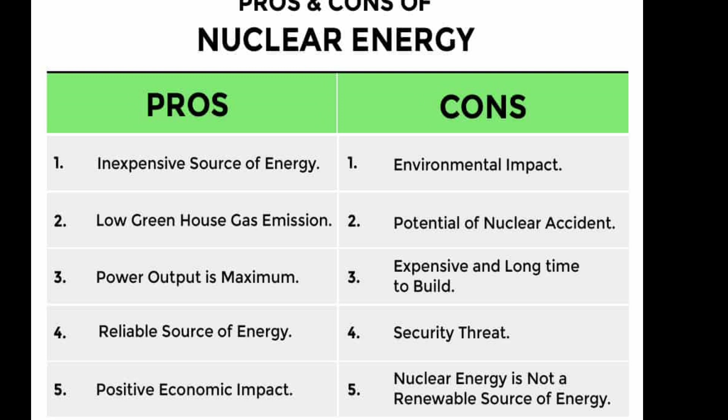About 80 miles north of Kiev, just between the border of Ukraine and Belarus, engineers found a woodland area with a low population density, a perfect place to construct a nuclear power plant. The Soviet Union was moving more towards nuclear power due to the distribution of its population, where the majority of civilians resided farther away from the main supply of energy sources in the eastern part of the region. The Soviets also knew that nuclear energy was less damaging to the environment than conventional power sources.

This woodland area to be used for the proposed power plant was about 9 miles northwest of the town of Chernobyl, with a population of 12,500. However, with the development of the Chernobyl power plant, the town of Pripyat sprung up just over 1.5 miles away with a population of 49,000 as employees for the plant and their families moved into the area.

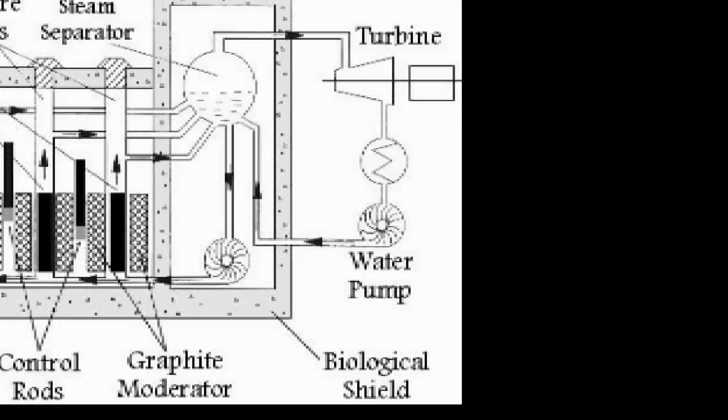The nuclear plant was slated to have 6 nuclear reactors. The first 2 RBMK-1000 reactors were built between 1970 through 1977. Units 3 and 4 were completed in 1983, and 2 more units were in construction at the time of the fateful accident. RBMK-1000 reactors were a Soviet-designed graphite-moderated pressure tube, which used 2% uranium-235 uranium dioxide fuel. Uranium-235 is a uranium isotope that can sustain nuclear chain reactions.

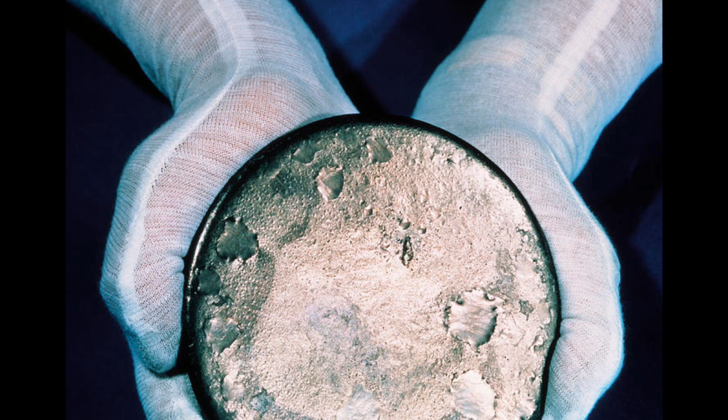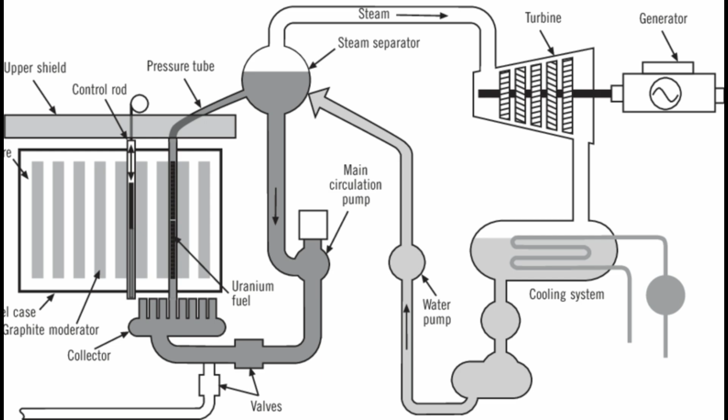These reactors use steam to power 2 500-megawatt turbines. The water pumped into the bottom of the fuel channels that boiled as it was pushed up the vertical pressure tubes to create the steam also acted as a coolant for the zirconium alloy-clad uranium dioxide fuel. In the design, there were 4 main cooling pumps, with one always being on standby. The reactors were also equipped with various safety measures, such as an emergency core cooling system and a minimal insertion of 30 control rods to absorb neutrons and reduce fission rate.

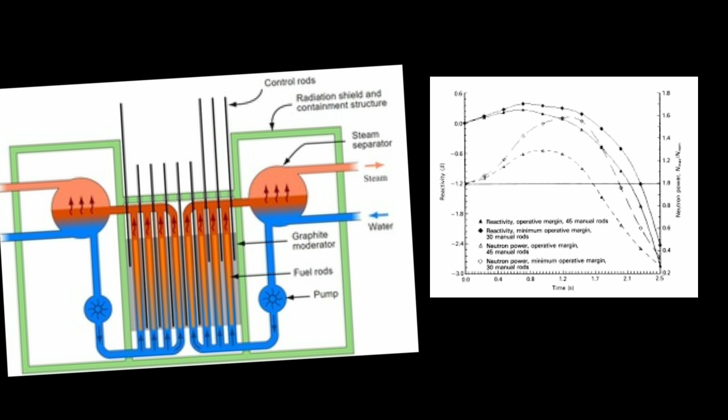However, one of the most important things to know about the RBMK-1000 reactors was that it possessed a so-called positive void coefficient. This meant that if the power increased, or the flow of water decreased, steam production would increase, so that the neutrons that would have been absorbed by the water now increased fission in the fuel. When the power increased, that meant the temperature of the fuel also increased, which reduced the neutron flux. The consequences of these 2 opposing forces vary depending on the power level.

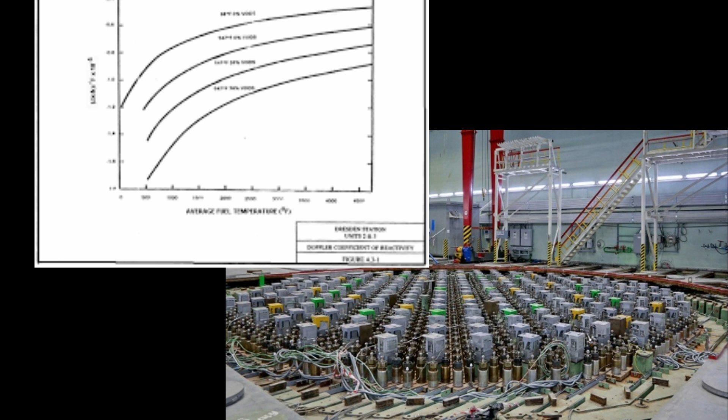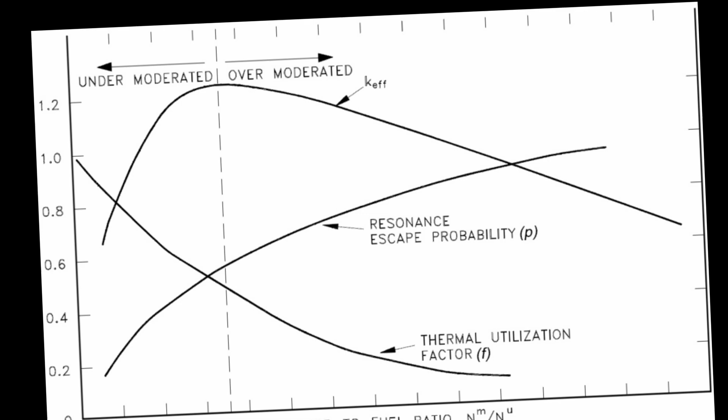When the power level is high, as it was during normal operations, the temperature effects win out, and the excessive overheating of the fuel does not occur. But when the power output is less than 20% of the maximum, the effects of the positive void coefficient win out, and the reactor becomes unstable and prone to sudden power surges. This was an integral part in the development of the meltdown.

On April 25, 1986, the Unit 4 reactor was down for maintenance. It was determined that at this time, nuclear engineers would take advantage of the reactor being down to perform a key safety test. The test was scheduled to be performed by the day shift, who'd been briefed in advance on how to perform the testing procedures. The test was delayed due to another plant going down.

Unable to begin until the early hours of April 26th, the uninformed and unprepared night shift had to perform the test. Deputy Chief Engineer Anatoly Dyatlov, sleep-deprived and ill-tempered, oversaw the procedure. Dyatlov was known for being arrogant, and often cursed at his subordinates for what he perceived as ignorance.

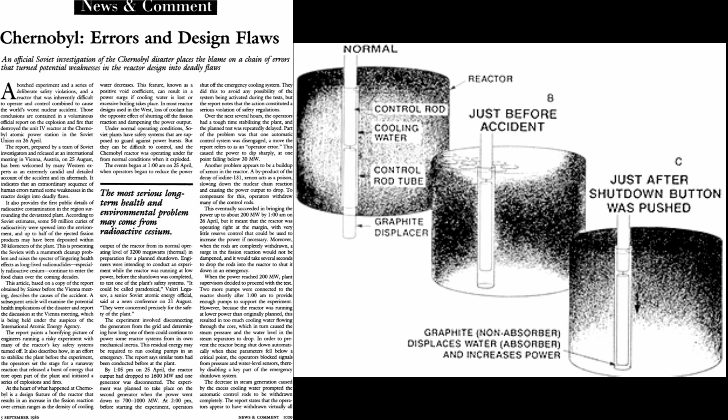Leonid Toptunov, the senior reactor control engineer, took charge of the reactor on the 5th shift just after midnight, and realized he'd made a mistake shortly after. Toptunov had never been in control of the reactor through the shutdown process, and was unaware of the design flaws that made accidents likely. He was well trained, having graduated from the Soviets' version of MIT, the Moscow Engineering and Physics Institute. He knew he'd made a mistake, and that safety protocols indicated he should stop.

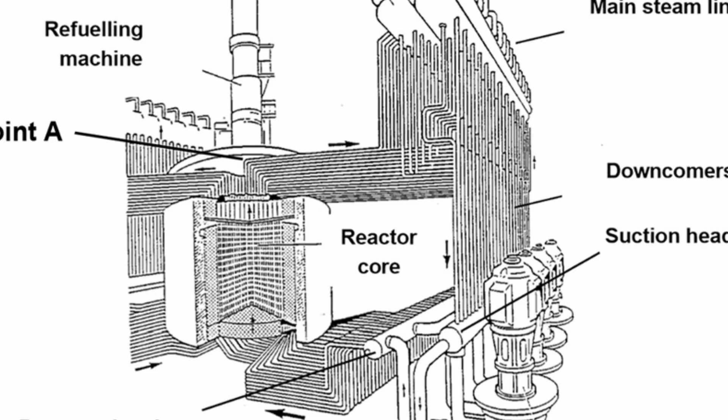But Dyatlov insisted on continuing on with the test. Not just one error, but a series of critical mistakes were made that on their own would not have caused such a crucial disaster, but fell together in a deadly domino effect. The plan called for the emergency core cooling system to be shut off. The reactor was operating at about 50% less than maximum power.

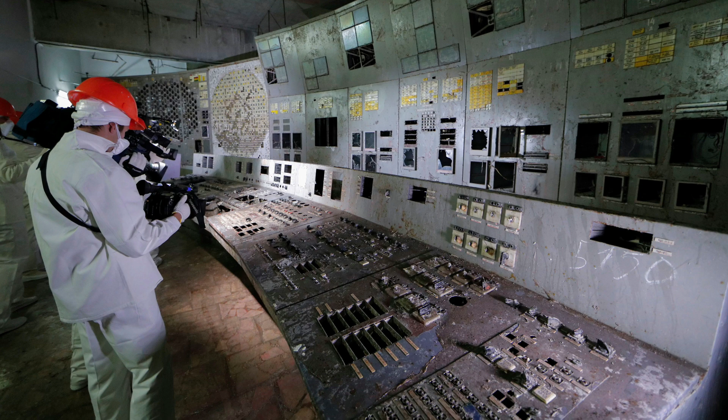For the test, the reactor should have been operating at 1,000 megawatts of thermal power, or MWT, but, due to the reduced power, was operating at 30 MWT. Operators tried to raise the power by turning off automatic regulators and reducing the number of control rods. Remember that a minimum of 30 control rods were necessary to operate the reactor, but during this test, operators only used 6 to 8. There was an increase in the flow of coolant and a consequent drop in steam pressure.

If the automatic regulators had still been active, it would have shut down the reactor when the steam pressure had been too low. But those had been shut off. To maintain power, operators had to remove nearly all of the remaining control rods, and the reactor became incredibly unstable. Operators reduced the flow of feed water in an attempt to maintain steam pressure, and the pumps that were powered by the slowing turbines were providing less cooling water to the reactor.

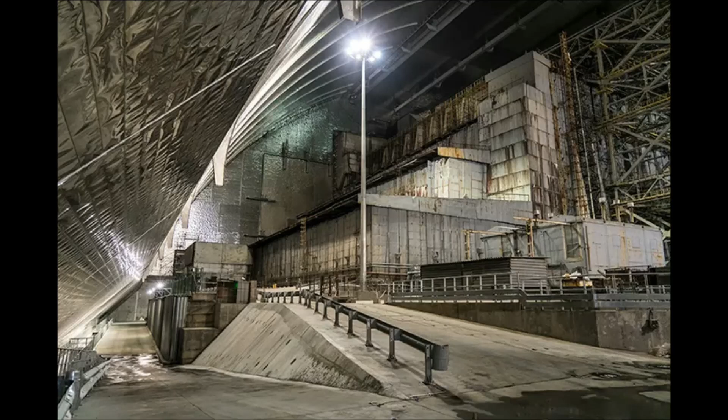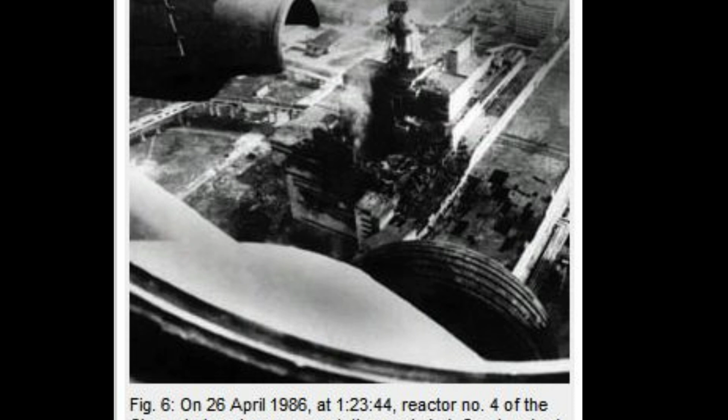All of these factors resulted in a power surge that was estimated to be 100 times the normal power output. The power surge resulted in a sudden increase of heat production, which ruptured part of the fuel. Small, incredibly hot fuel particles then reacted with the water, and at 1:23 a.m. caused a steam explosion that destroyed the reactor core. A second explosion occurred 2 to 3 seconds later, and while it's uncertain what caused the explosion, it's hypothesized that hydrogen might have played a role.

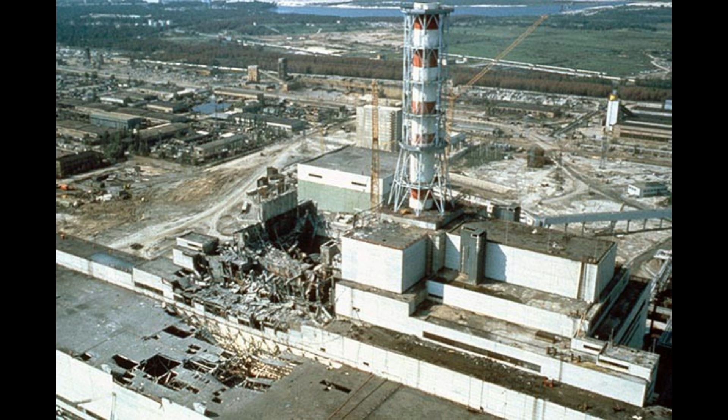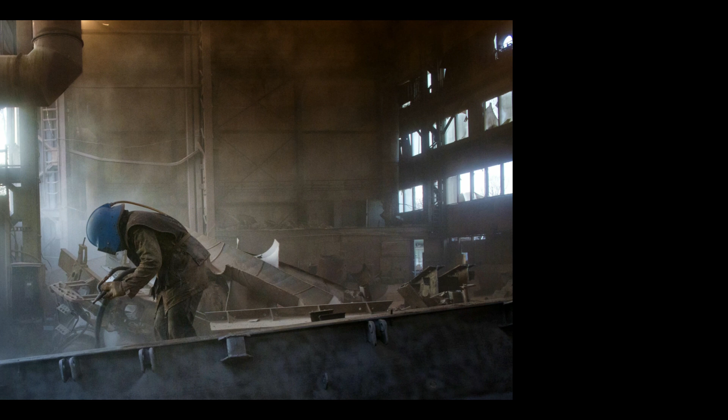These explosions sent fuel, core components, structural items, and highly radioactive debris skyrocketing. The plume of smoke and wreckage from the reactor rose over half a mile in the air. Fires broke out in what remained of the building that had housed the Unit 4 reactor, which added to the smoke, steam, and dust. Additional fires started in the adjacent building that housed diesel fuel and inflammable materials. Originally, 14 firemen arrived on the scene at 1:28 a.m., with reinforcements pulling in about 4 a.m. Over 100 firefighters were called in, and this group received the highest radiation exposure.

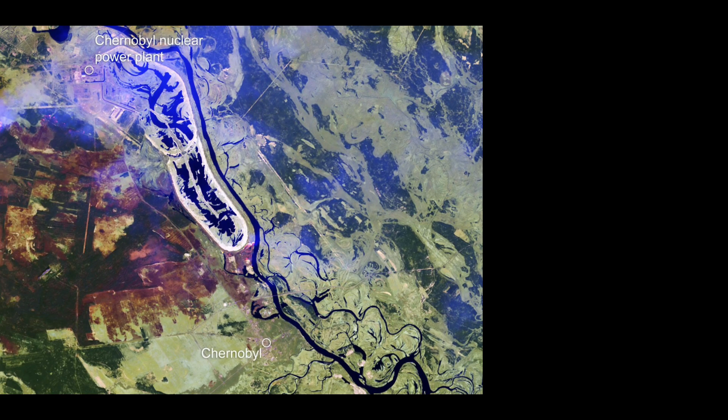While some of the original fires had been put out by 5 a.m., the graphite fire had started and was responsible for the dispersion of radionuclides and fission fragments high into the atmosphere. Emissions continued for 20 days after the explosion, although they were much lower after the 10th day when the graphite fire had been finally put out. By the end, 50 million curies of radiation had been exposed into the atmosphere, which is the equivalent of 500 Hiroshima bombs.

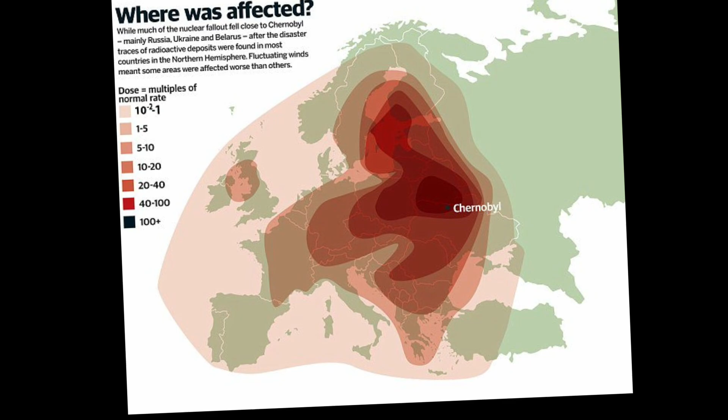While the USSR hadn't seen a nuclear disaster of this magnitude, they'd covered up separate mistakes at this plant prior. In 1982, there were radiation leaks that were covered up, quote, "to prevent panic and provocation rumors," end quote. In 1983, Moscow leaders received reports that the Chernobyl plant was one of the most dangerous plants in the USSR due to lack of safety measures. There were also separate emergencies at the plant in 1984 that had been covered up, according to documents released by Ukrainian authorities on the 35th anniversary of the 1986 explosion.

General Secretary of the Communist Party of the Soviet Union, Mikhail Gorbachev, received the call informing him of the reactor explosion around 5 a.m. on April 26th. Gorbachev later stated that, quote, "In the first hours, and even the first day after the accident, there was no understanding that the reactor had exploded and that there had been a huge nuclear emission into the atmosphere," end quote. At the time of receiving the call, he saw no need to wake up other members of the Soviet leadership or call an emergency session of the Politburo.

A state commission to investigate the cause of the explosion and deal with the consequences was created instead. Boris Shcherbina was tapped to act as chairman of the government's Chernobyl Commission. He arrived on site around 8 p.m. on April 26 to find that very little had been done by local leaders to take responsibility for the disaster.

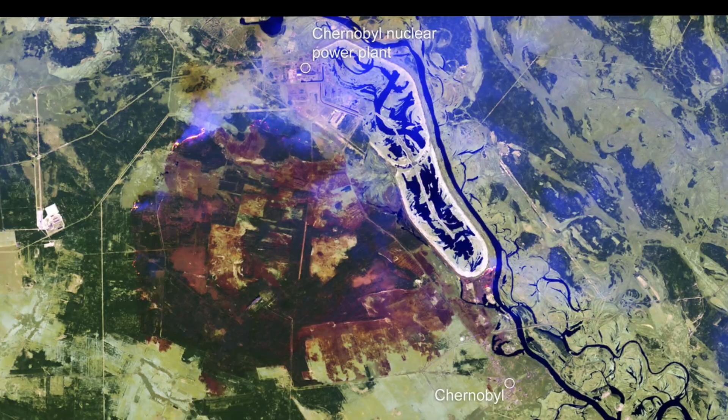They needed to figure out how to put out the graphite fire, since using water could make the blaze worse. It was determined to use sand, and Shcherbina called in military helicopters and chemical units. Citizens of Pripyat still had not been evacuated from the city.

The Soviet Union had adopted regulations in 1963 that stated that evacuation of civilians was not necessary unless the radiation dose accumulated by individuals reached a Röntgen level of 75. Radiation levels were increasing in the city from 40 to 300 to 320 microröntgen per second, or 1.2 Röntgen per hour.

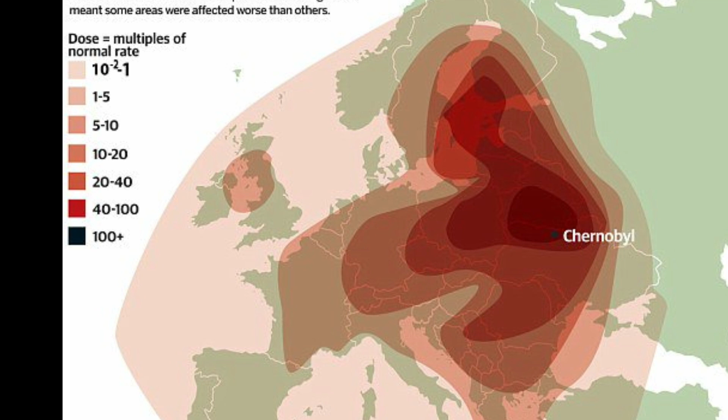Armen Abagyan, director of one of Moscow's nuclear power research institutes and member of the government commission, demanded that Shcherbina evacuate the city. But because calculations were showing that the intake of Röntgens was about 4.5 a day, the commission's senior medical officer Yevgeny Vorobyev was reluctant to take responsibility for ordering an evacuation.

Although media exposure was prohibited, people started to leave the city as rumors started to circulate about what had happened at the plant. Engineers and workers were not allowed to share news of what had happened. Citizens noticed police officers and soldiers wearing gas masks while they were provided with nothing and were going about their day as usual. Children were sent home from school with instructions to take an iodine tablet and stay indoors.

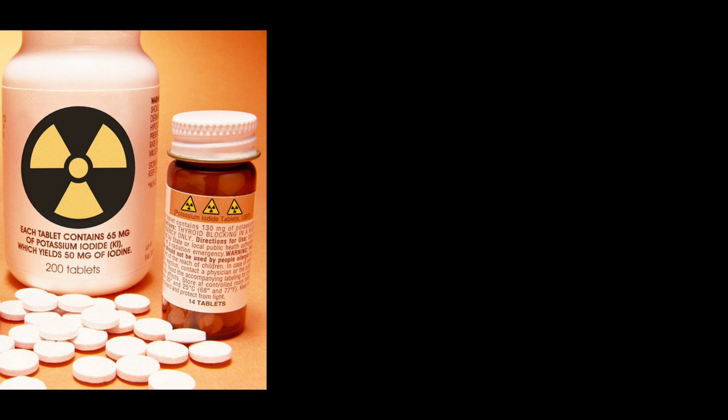By midnight on April 26, Abagyan and other scientists had convinced Shcherbina to call his boss, Premier Nikolai Ryzhkov, to approve the evacuation of the city of Pripyat. The entire city was evacuated in 2.5 hours the next day, with the exception of 5,000 workers at the nuclear plant to ensure the shutdown of the reactors, and elderly who didn't understand why they had to leave when they'd been told they could return in 3 days.

Evacuees carried radiation exposure to their temporary homes in their bodies, on their clothes and personal belongings. KGB officials were busy trying to squash the spread of, quote, panicky rumors and unreliable information, end quote. But of the 1,000 people who had moved to nearby towns and villages following the accident, 26 had been admitted to the hospital the very next day with symptoms of radiation sickness.

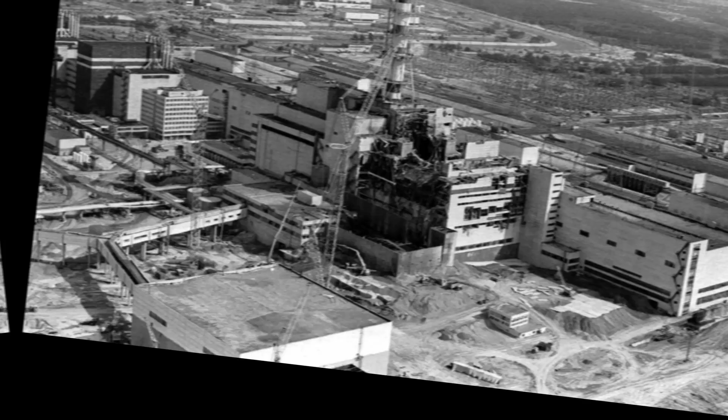The buses that had helped transport the evacuees were sent back to their regular bus routes in Kiev, spreading high levels of radiation across the city of 2 million people. Central Party leadership refused to cancel the massive May Day parade in Kiev, despite increasing levels of radiation. Hundreds of thousands of school-age children were evacuated after that, but, unlike those of Pripyat, were allowed to return in the fall.

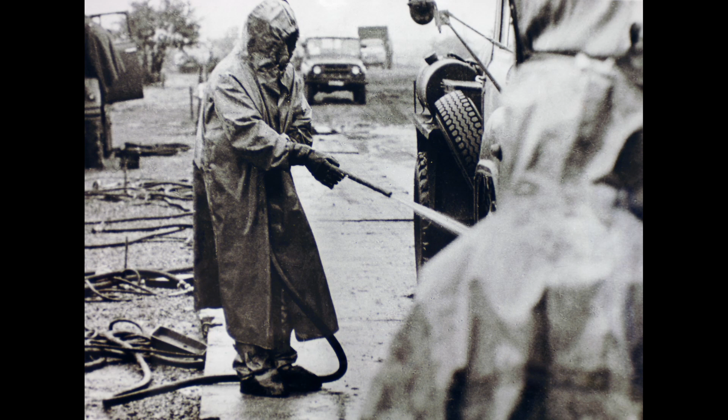The USSR would not report to the world about the incident until April 28th, and only because Swedish leaders demanded an explanation for registering unusually high levels of radiation near their plant in Forsmark. In the state broadcast, they were quick to follow the 15-second statement about Chernobyl with information detailing nuclear incidents in other Western countries, such as the Three Mile Island accident in the US.

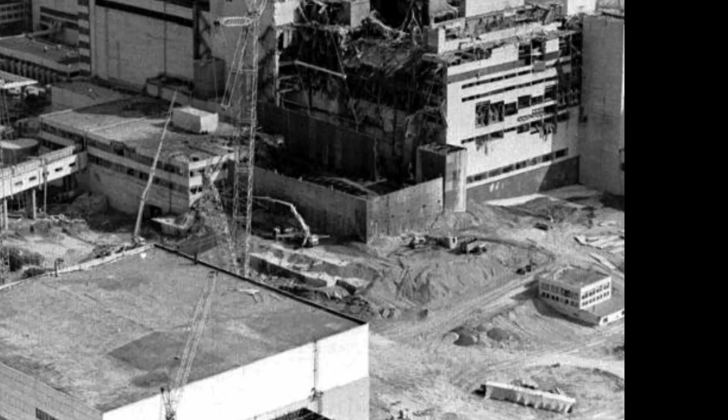The explosion at Chernobyl and the subsequent media cover-up was the catalyst for the opening up of the USSR media. Gorbachev had introduced the policy of glasnost, the practice of a more open, consultative government and wider dissemination of information, in 1985. But this had been the first major test of the policy. It failed spectacularly. The global ramifications of trying to cover up a nuclear disaster further strained already tense relationships with Western countries. Soviet propaganda was battling foreign media instead of providing information to their citizens.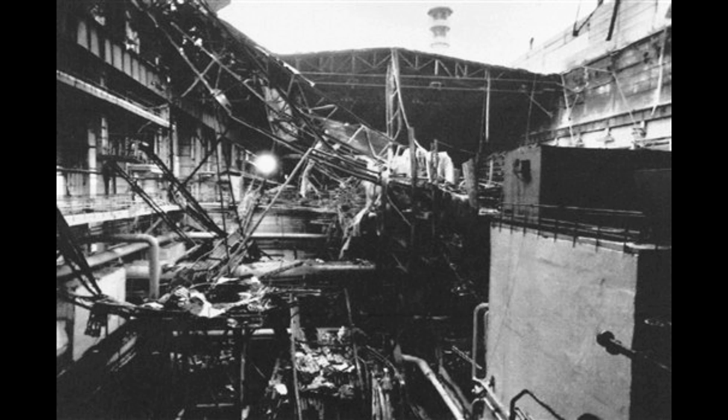Even Gorbachev seemed to be frustrated by the initial lack of information, as seen in a transcript of an emergency Politburo meeting. Gorbachev believed that to restore the Soviet system, the channels of information had to be opened up. Vitaly Korotich, who had strongly condemned the media cover-up, was appointed as the editor of Ogonyok, a weekly illustrated circulation that produced 1.5 million copies. Moscow News was revamped and reported on Gorbachev's restructuring program.

Other publications soon followed suit, and this opening up of Soviet media played a critical part in the dissolution of the USSR within the next 5 years, as it took away the government's ability to hide behind lies. Once the glass had been cracked, the downfall of the regime was imminent. Without the mismanagement of the Chernobyl nuclear explosion, do you think the USSR would still be around today?